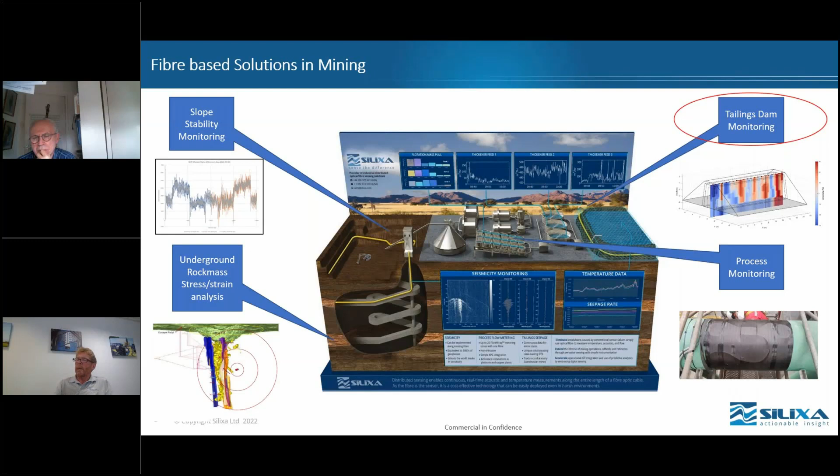And obviously, the common failure modes of tailings dams that have been recognised in the past are overtopping, obviously then a breach and loss of containment, seepage and erosion within the dam structure itself, that's water movement, and then instability due to excessive deformation within the embankment. And I've put a couple of other points under there, which I think may be more kind of forward-looking.

We may have to use more foresight when we look to the future, because perhaps our new resources are going to be exploited in more seismically active regions. So is natural or induced seismicity going to be an issue that we need to understand more in the future?

And then the other point is climate change. How do we anticipate changes due to the maximum design flood in the design of these facilities? Because the world is changing and there isn't probably a great enough understanding of the effects of climate change. So I think probably that is going to lead to the need for additional instrumentation on tailings storage facilities.

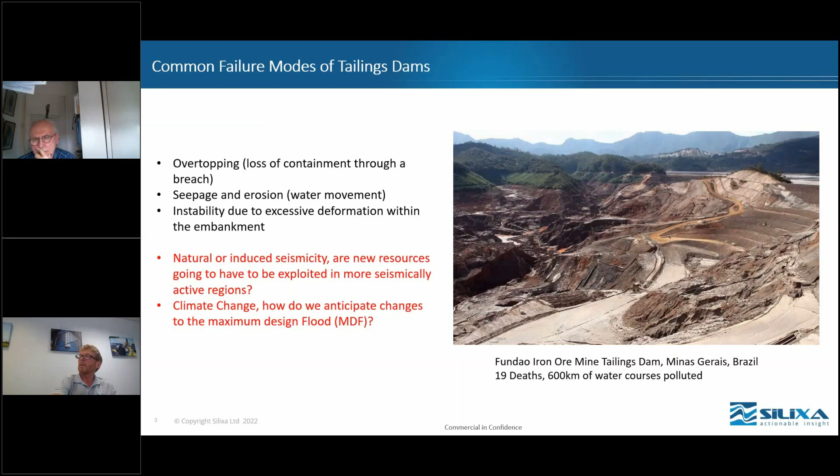A lot of conventional instrumentation is used in this sector, and a lot of it is complementary. There's a good example here, which I've picked up from Chapman, published in 2021. Obviously, we're able to observe the issues of overtopping, internal erosion, slope stability, instability, and many techniques exist for this. I borrowed a slide from RST Instruments, one of our partners in North America, which shows a good graphic of the type of instrumentation.

We see there are opportunities working in this field due to some of the challenges of conventional techniques: perhaps reliability of electronic systems, maybe the cost of ownership across a long project of existing systems built on electronics, perhaps the sparse sampling provided by the conventional technology, relatively small measurement resolution in some instances, maybe millimeters or multiples of millimeters if we're using satellite techniques. And to create a dense enough array of measurement, a significant number of penetrations perhaps need to be created into the structure.

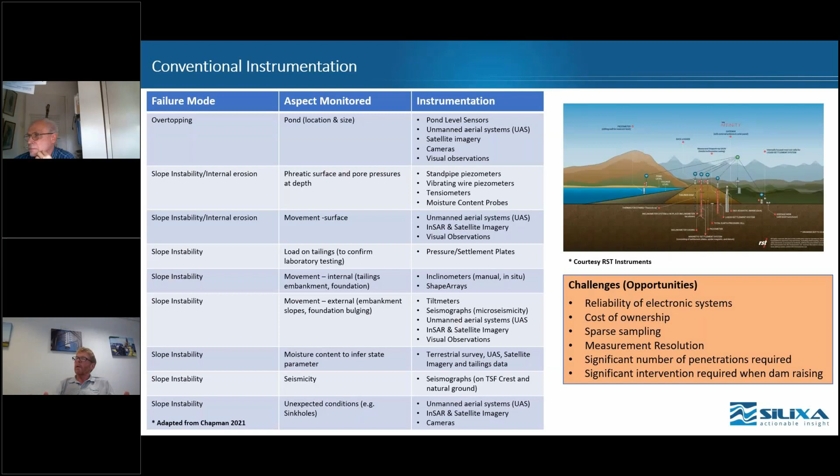And of course, the dam never lies still. It grows with time, and every time there's a dam raising, the instrumentation needs to be adjusted or moved, and there's a lot of intervention related with this. So we see opportunities for the application of optical fibers to overcome some of the challenges with conventional techniques. But I'll show a summary at the end where I believe that we actually, to a great degree, complement many of these techniques, perhaps with the potential to substitute for some of them.

Now, what is distributed fiber optic sensing? An optical fiber has small impurities in it, which allow light to be scattered back to a source of light. A box typically has a laser which sends a pulse of light into the optical fiber, and as it travels through the optical fiber, small reflections are created.

The way that I explain this to lay people is that if we are driving at night in kind of misty, going back to North Shropshire, Mike, it's foggy. When I remember the 70s, when I'd be driving to see a girlfriend or something in the fog, you get some reflections from the fog particles coming back through the windscreen. Little speckly lights, and actually this is what we see in an optical fiber.

The character of the reflections is altered by either temperature, acoustic, or vibration, which is a simple way of describing what an acoustic signal is, and strain. Because these reflections occur at every point along the optical fiber, we're able to create a very dense array that allows us to sample a change in temperature as little as every quarter of a meter along the optical fiber, or a change in static strain every 50 centimeters, and in the case of a vibration or acoustic signal, every 2 meters. So it creates a distributed sensing array.

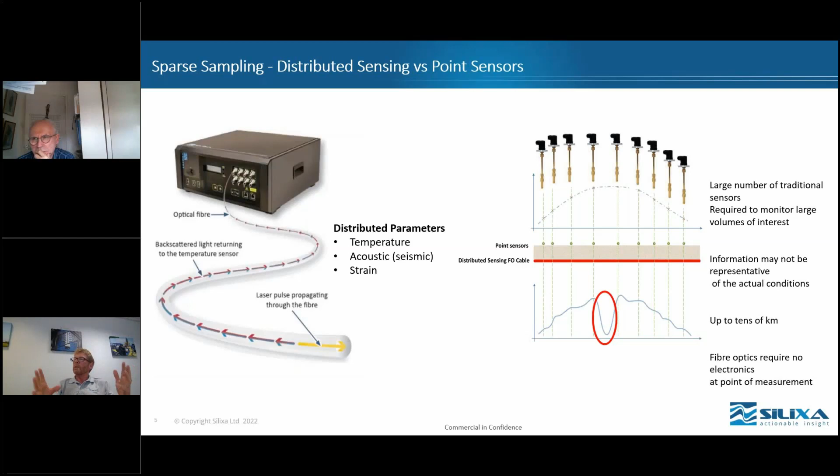When we contrast this to conventional single point sensors, in order to create a large array, it's going to be comprehensive instrumentation. But point sensing does have its weaknesses, because there may be events that occur between two point sensors that can't be detected by the point sensor, but will be detected by a fully distributed system.

And we can make these measurements up to tens of kilometers. We operate in the deep water part of the Gulf of Mexico, where we're able to measure changes in acoustic response up to 100 kilometers away from the source where the box is. And I'm going to show an example where we have 40 kilometers of cable in an unnamed storage facility in Australia, where we operate these measurements over tens of kilometers.

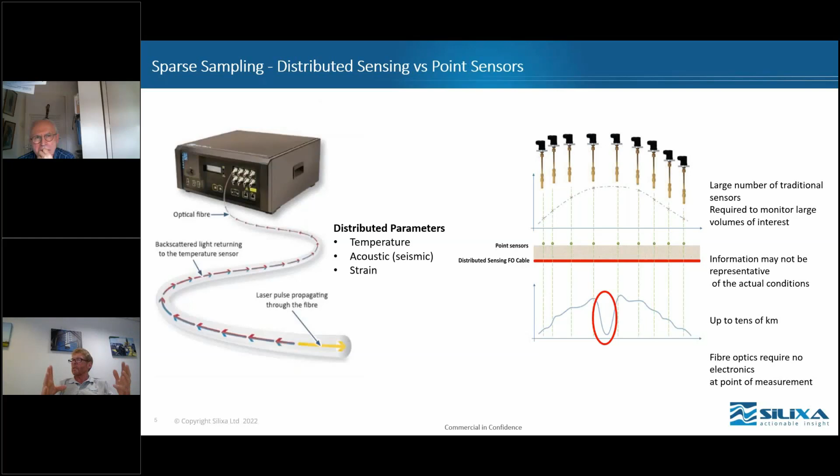Very quickly, what does it look like? Well, it's very simple. We lay an optical cable at the toe or the heel or the top of the tailings dam. The cable is very robust. Very often we use military specification cables because they have some degree of armoring. In certain geographic areas, rodents like to eat the cables, so we have to make sure that they are armored.

The cable contains a number of optical fibers because we're able to make all of those measurements I described previously at the same time and at the same location. So having multiple optical fibers in a cable allows us to do that. And the cabling, because it's essentially developed for other purposes, either telecoms or military use, is actually quite cost-effective. So we trench them into the environment, the infrastructure, and we can also put them into vertical boreholes too for specific points of observation.

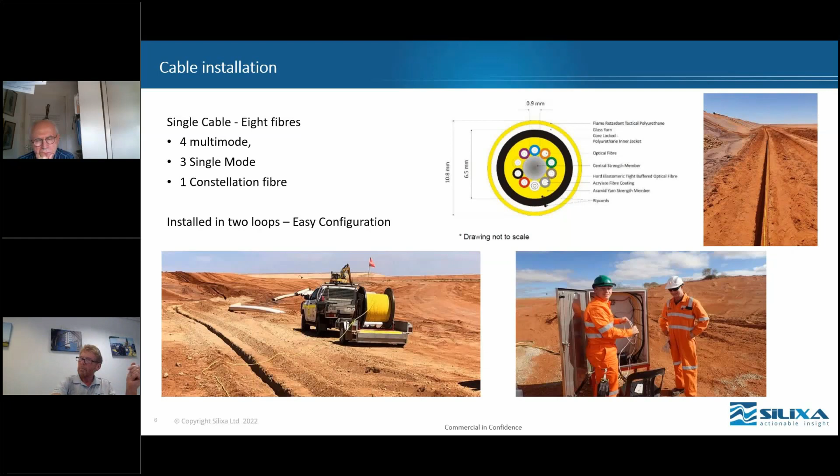Now we have created a solution which we call Dam Pulse, and it is a tiered solution. And what it allows us to do is to monitor the whole entire dam very effectively. We create very high spatial sampling because we can sample, depending on the measurement, as frequently as every quarter of a meter. And we can program alerts into the system. And we're also enabled to give real-time processing and visual presentation of data.

Then the next level is seepage. We're able to measure seepage through seasonal variation and distributed temperature. And for each of these levels, I'm going to show you a following slide which just builds in a little bit more detail, but still at relatively high level. And then level 3 is deformation. This is where we use the distributed static strain, the movement that is going to be measured by a cable when we get movement of the Earth and the environment around it.

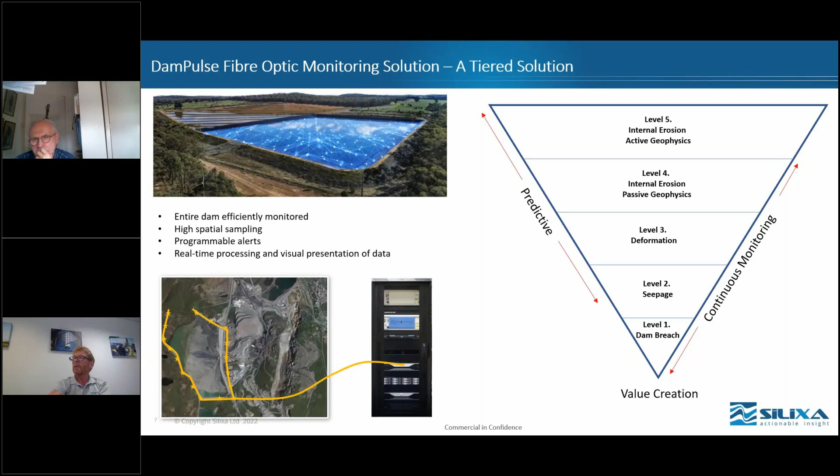So I'll just quickly pass through each of these levels one by one, just to give you a greater understanding of each of them. So level 1 is the breach system. Essentially what we have is a very simple module, which is constantly measuring attenuation along the optical fiber. And this is able to detect a significant movement and behavior in the optical fiber. And this may be as a result of a breach. And we've got a number of activities, particularly in South America at the moment, where there have been some issues around actually the failure more of tailings lines than the structure itself.

And when we place a temperature measurement device alongside that, we're not measuring temperature, but the temperature measurement device has a better spatial resolution, so that we can detect the event to a much greater pinpoint along the optical fibre. It's a very cost-effective combination. The power requirement is very low, so we can operate this through a battery bank, which is powered either by turbines or solar, and then we are able to communicate data through RF antenna into the client infrastructure.

So this is probably at its simplest, and it's very cost effective. I think we're marketing these into the market at maybe about $100,000 of capital expenditure, and then a subscription for support once the system is installed.

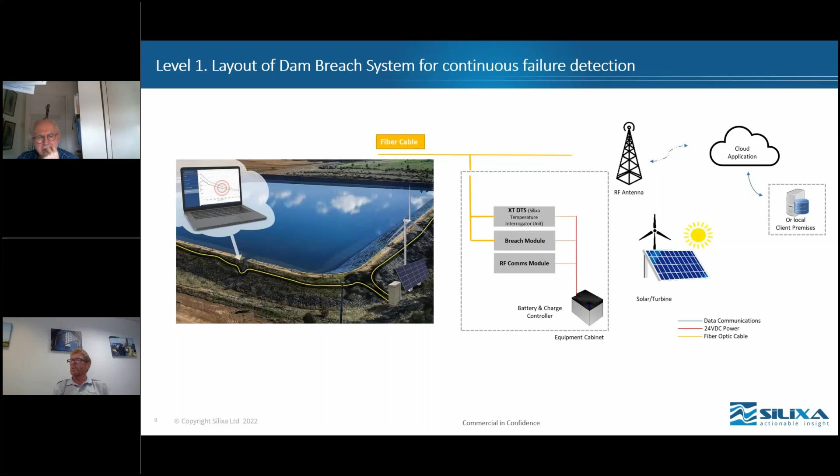And then we go beyond that to level 2, and this is where we then use the same distributed temperature sensor that is inherent in the dam breach system to actually detect changes in temperature. And in many regions of the world, particularly in the mid to higher latitudes, there is significant seasonal variation, and there's temperature inertia, so that when fluid flows across the optical cable, which is based at, say, the toe or actually in the core of the dam.

Okay, we're able to detect temperature, and if we see a significant temperature anomaly, which is related to flow of fluids from the lagoon, which will flow at a different temperature because of this inertia effect, we're able then to detect changes in seepage. And we're able then to measure these points at a very high spatial sampling. Every meter we can measure a flow point.

It's got extremely high temperature resolution, 0.01 degrees centigrade resolution, and allows us to have a threshold of measurement as little as 0.01 litre per second. And it tracks the changes in seepage flow. So therefore, we're then able to identify areas where we're seeing significant amounts of flow, which will lead to erosion. And I'll show you a slide at the end of this. This has been quite widely applied now in Sweden. LKAB perhaps are one of the bigger users of this.

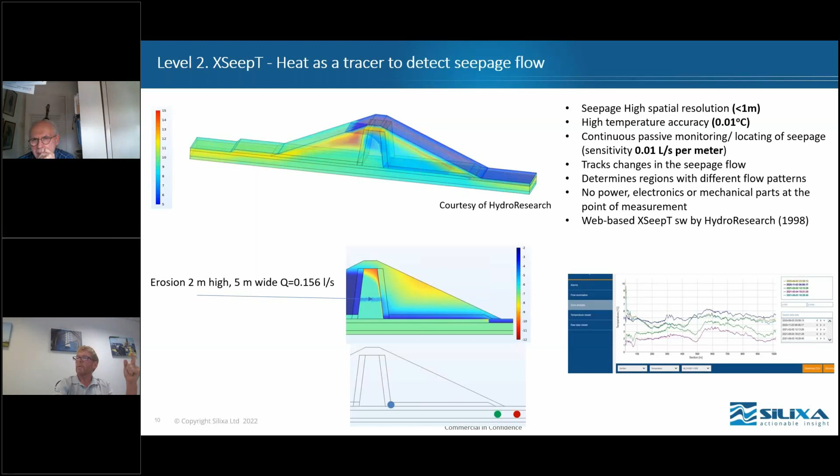And then we go into level 3. This is the strain monitoring using distributed static strain. This is actually a real data set. This is a new tailings storage facility in Australia, which we'll see a couple of times in this presentation. And there are 2 lengths of cable, which are each 20 kilometers in length. So we've got the length of cable here, and then also another length of cable here.

What this is showing is the baseline strain measurement at the installation of the cable. This is quite a new facility, and we're able to see changes in microstrain that occur along the 20-kilometer length of one of these cables. And this is our baseline information.

So then, during the life of the embankment, we'll be able to see changes that are occurring due to operation of the system, or maybe degradation of the system. And of course, we've got to understand, there's going to be natural compaction and settling of the embankment. So we'll see these effects also in the system.

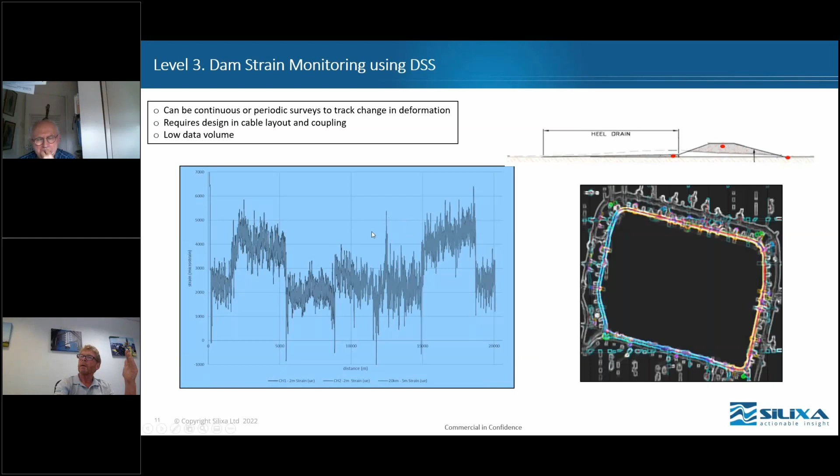And then we go to levels 4 and 5, where we start to use geophysics. So distributed acoustic sensing acquires seismic signals along many kilometers of fibre. And it's actually equivalent to placing a string of geophones end to end every meter. That's the spatial sampling we can create with optical sensing. And essentially it allows us to provide both passive and active seismic acquisition and imaging capability.

So the measurements I've talked about previously are what I call near field measurements, where a change is seen on the optical fibre. But actually when we use geophysics or distributed acoustic sensing, we're actually able to image. So when we use passive geophysics, we're able to exploit ambient noise interferometry, which allows us to look at anomalies that occur over a period of time.

And this is published. This comes from a piece of work that's underway in Sweden, where there's actually a test dam, and some of you may be familiar with this. And DAS measurements have been applied on this test dam. And we're able to look at the changes in seismic velocity that occur through the dam over time, and then relate that to known anomalies, because the dam has been constructed with imperfections in it as a reference case, and we've been able to quite effectively identify the known anomalies, weakness points that have been constructed into the dam.

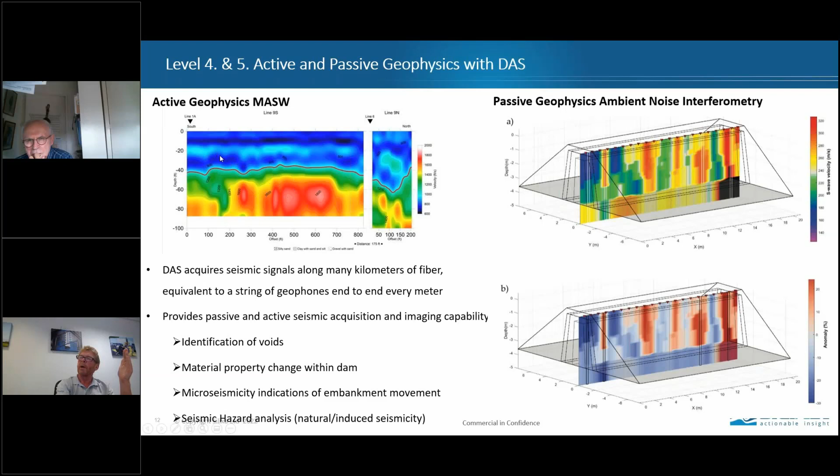And then when we use active geophysics, which does require a source, we're then able to look at the shear waves and the change in stiffness of the shallow subsurface properties, which again are maybe an indication of change of behavior of the materials within the dam.

Then that's my wife calling. Not a good time.

So then, in terms of the monitoring system architecture, this is somewhat generic. Regardless of the parameter being measured, we're able to bring all the information into an edge computing platform, which is then able to contextualize all the data sets. Each of them, of course, parameters being acquired independently of each other, so it needs to be synchronized in both time and position.

And then with the edge platform, we can provide Internet of Things connectivity, either into a local area network or into the cloud, or also allow remote viewers or operators to be able to reconfigure the system and of course create alarms. So that's a reasonably generic view of being able to gather what are significantly dense data sets, and then put them into the user environment.

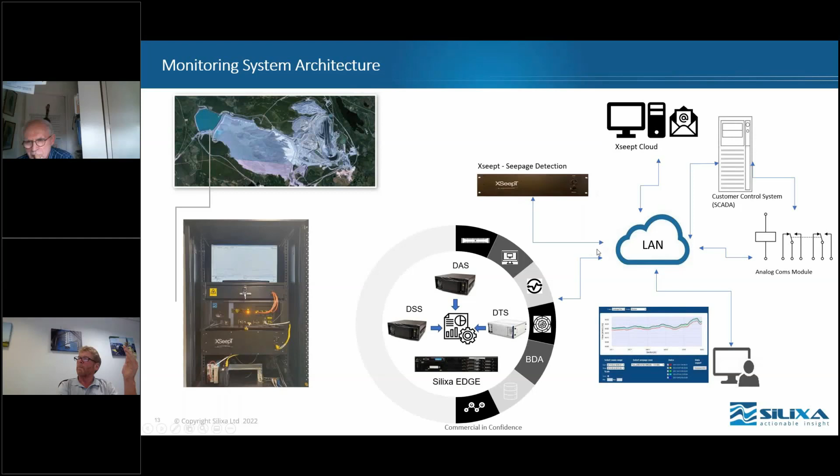And in terms of our track record with this, over 100 fiber optic systems have been installed in dams and embankments. Some of these are in hydropower. Many of them are in the mining sector. They've been applied in Sweden, Canada, Australia, and many parts of the world. We have a long-standing relationship with HydroResearch, a Swedish company, some of you may be familiar with them, who developed some of the early algorithms in using temperature to measure changes in seepage flow. And the first installation in a tailings facility was carried out by Boliden in 2000.

And since then, over 200,000 meters of cable has been supplied into the dam sector. And one of our activities during COVID, and I think that's been a great achievement for us, is being able to remotely supervise the commissioning and installation of our DamPulse system in a new tailings storage facility in Australia, where over 20 kilometers of fiber was deployed during the pandemic. And cables have been placed, or will be placed as the dam develops, into the drain and into the crest of each of the areas as they build out the dam, as shown here.

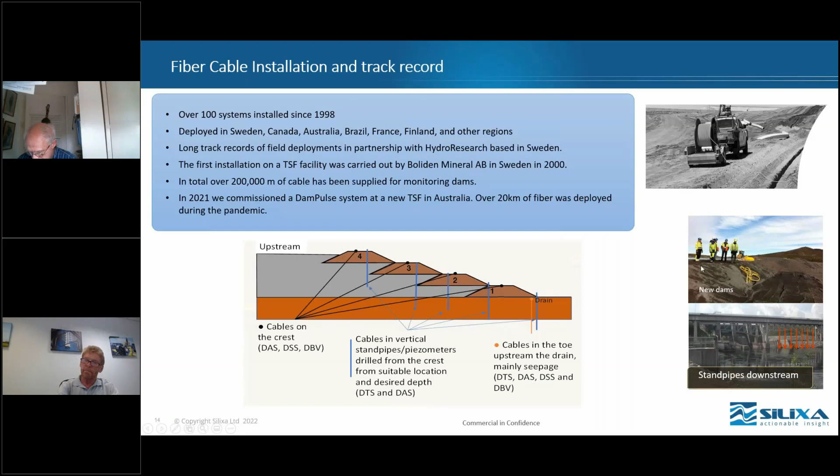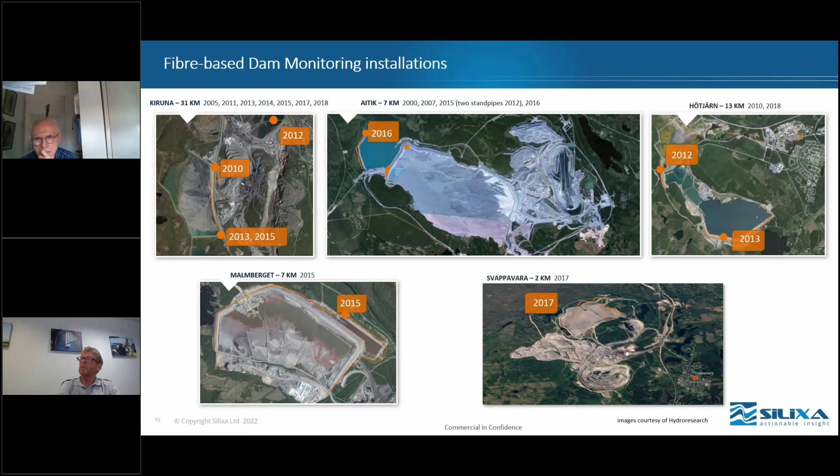And then moving to closure of the presentation, this is just an example that gives an understanding of the extent of this work. This is Kiruna in Sweden. Many of us are familiar with Kiruna, and we see how the system has evolved over this period of time, and significant numbers. I would say that the Swedish sector have probably been more aggressive early adopters of this technology than some other parts of the world.

And then two of our current projects. I have spoken about this one previously. This is the storage facility in Australia. Many of these areas are somewhat sensitive, so I'm not allowed to disclose the name and location of the operator, but there are two lengths of 20-kilometer fiber placed into this. We've collected the baseline data.

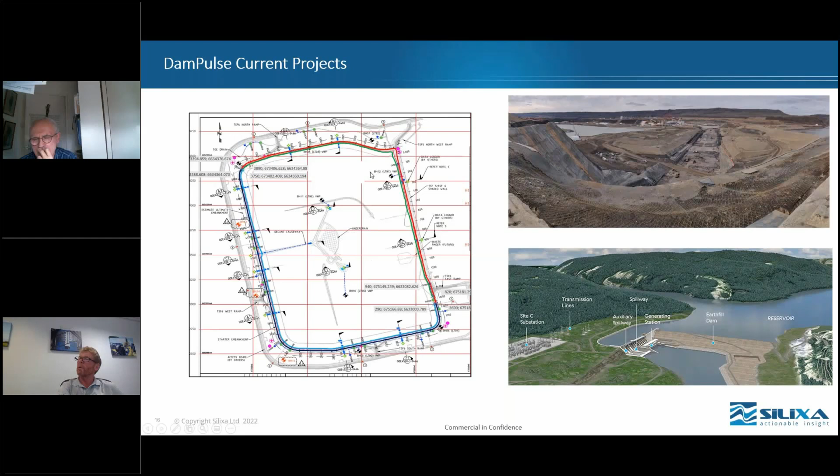And then this is in a slightly different sector. This is a well-known piece of work that's underway now in British Columbia for BC Hydro. This is a new hydro barrage being built on Peace River, in northeast British Columbia. If you go onto Google Earth, you can see this thing. It's huge. And we are now midway through the process of laying sensing cables in the core of the structure. When it's completed, it will look very much like this, with an earthfill dam. Both these systems have the complete array of measurements, which takes us really from the dam breach right through to the geophysics.